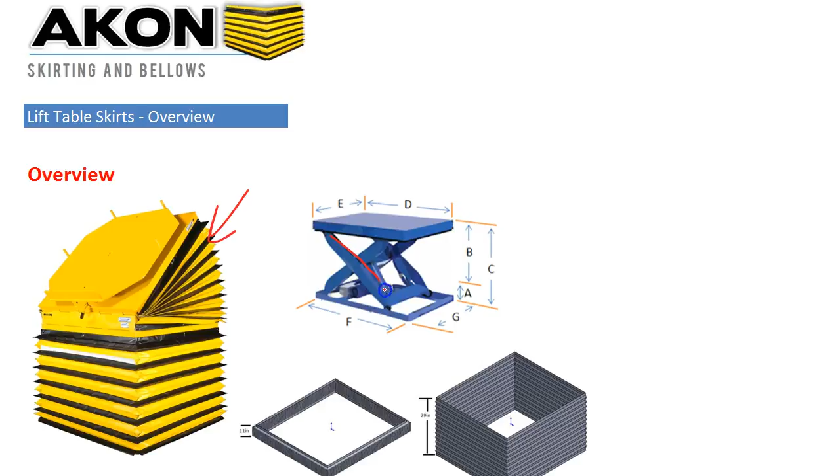A lift table skirt, to define exactly what it is, is material that covers up the dangerous scissor arms located inside a scissor lift table. These scissor arms are shear points, so they have to be guarded because people can get their foot or hand in these areas, presenting a safety hazard for workers. OSHA requires guarding pinch points from devices or machines in your facility to protect your workers. That's where the lift table skirt comes into play.

It's essentially a bellows, so it looks like this, and you have an inner dimension and an outer dimension, which we'll talk about later. The lift table skirts connect around the frame of the lift table, and then they go down and drag or rest on the floor. Some people choose to connect them to the base. Usually the top size is larger, so you would attach here and might have a large top platform like this. So you have a smaller skirt even though you have a larger top platform which has dunnage on it.

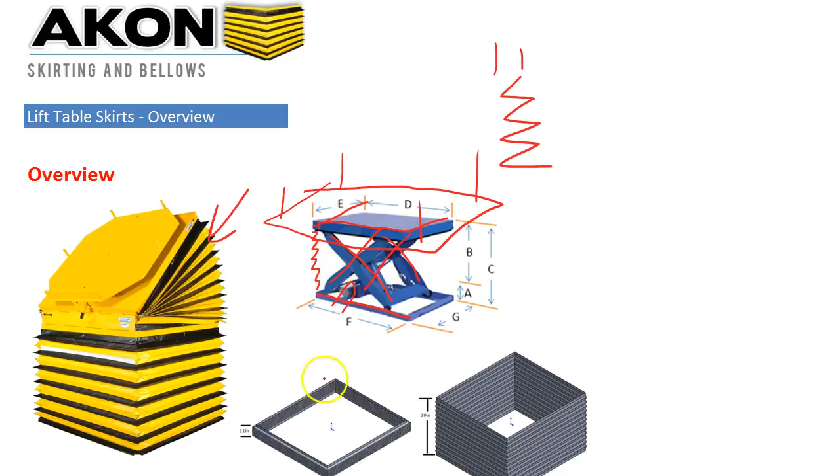The materials used most commonly, I would say probably about 95% of all skirts sold, are a stitch skirt. You can see here there's vinyl flaps stitched together. We take great pride in giving a very clean looking stitch. The material is a 22-ounce vinyl, industrial grade, rated for up to 160 degrees Fahrenheit. You can do moderate welding around this material. It's fire retardant. This is what it looks like when it's installed on a lift table. They look very clean and can be just about any size.

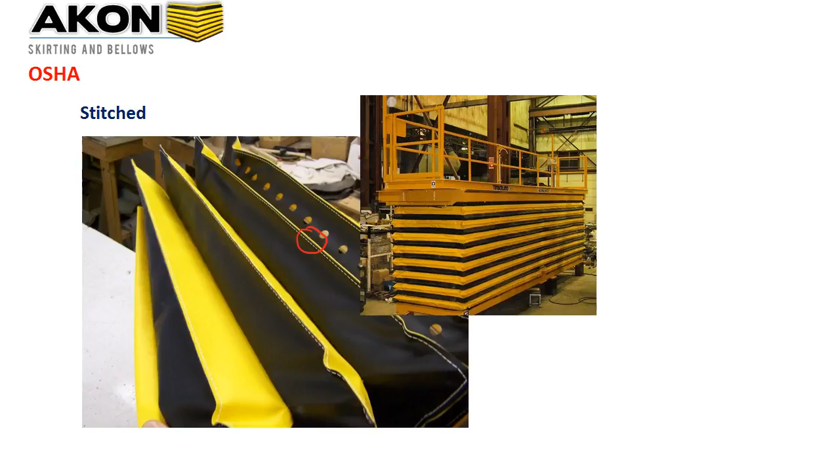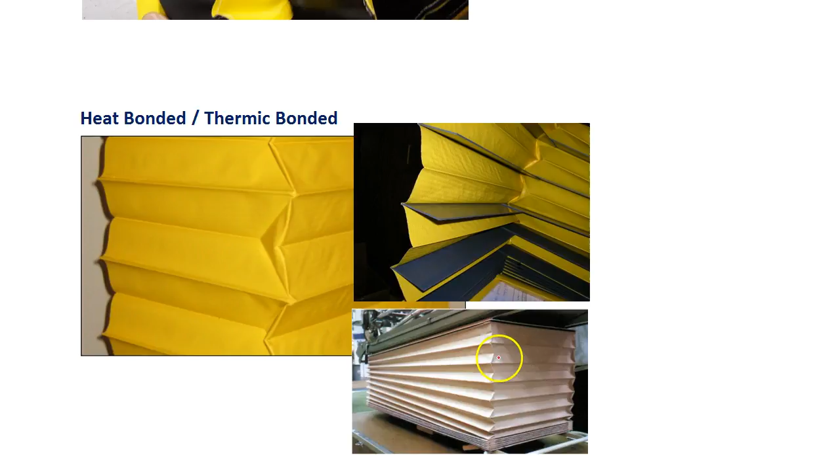Another material, which is also fairly common, is the heat bonded thermic material. This has more of a crisp look, and we sell this to Xerox, one company that purchases this from us, and other facilities who need a very clean looking skirt. This is actually reinforced with a PVC rib, which runs every other fold, and that's what's providing the structure to this skirt. Where it gets the heat bonded description from is it's heat bonded to that rib the full length, so it's bonded right to that PVC rib structure. It's a very strong skirt, great for real small folds. If you need a 1-inch fold, we can use a very small rib, and this has a very clean, crisp look to it. It's a more expensive skirt than the stitched, but sometimes the aesthetics are what people are after for that particular model.

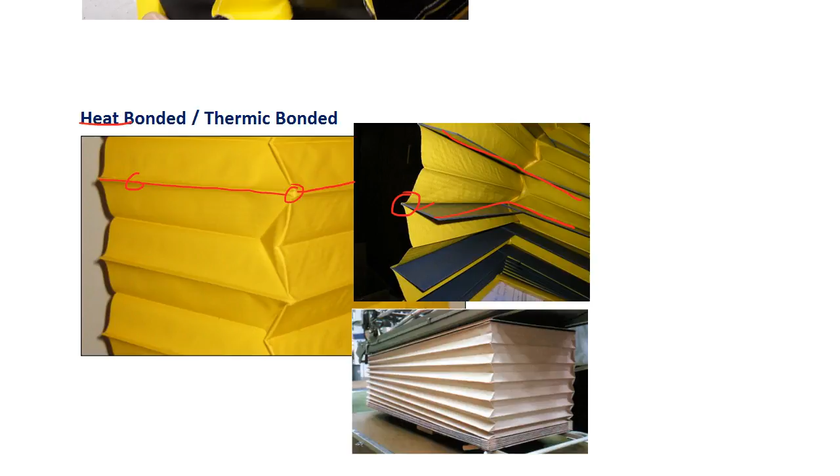Then we have medical grade skirts. These are used around a wire frame. You can see here a stainless steel wire rib, and the material is pulled over it. This has approximately a 1.5-inch fold. The ID is the inner part and the OD is the outer part, so it's 1.5 inches greater than the ID. This material meets a lot of high specifications as far as flame retardant, washdown applications where food processing is concerned. This is a very nice skirt, but definitely the most expensive one we sell, so we only use it when it's absolutely necessary based on the application.

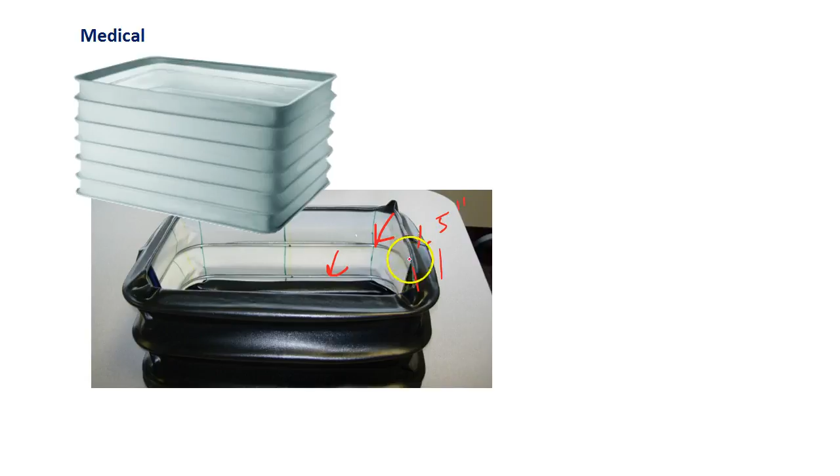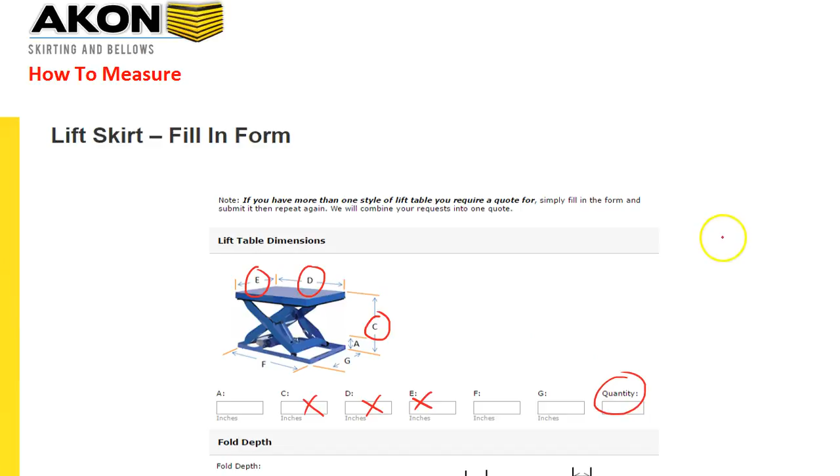As far as measuring, this is our actual RFQ form right from our website, so we'll walk you through this. The information that is critical is your top platform size, E and D, and also the raised height, C. So if you can give us E, D, and C, that's basically the information we need. If you have A, G, and F, that's helpful as well. But if you give us these three, and of course the quantity, we're good to go to provide you a quote for the most part.

Now fold depth is the depth of the fold. Remember we talked about ID and OD. An external fold is the safest and most common, and a 3-inch fold is the most economical and most common. Here you can see the fold is facing away from the lift table, whereas the internal fold faces inward. The smaller the fold, the more expensive it is, and also the higher the stack up of the skirt because there's more material. The 1.5 and 2-inch are more economical than the 1-inch, and the 3-inch is the least expensive. So if in doubt and you don't have any space constraints, just choose the 3-inch.

The fold location, as I touched on above, is either facing inward or outward. The outward is the most common because you don't have to worry about the fold coming in and hitting the scissor arms, or maybe there's a motor or something inside your lift table you need to be aware of as far as how far that skirt fold can face inward. You don't want it dragging on anything or rubbing on anything, so you want complete clearance for it to go up and down.

So again, if you're in doubt, just choose the external fold unless you have some specifics of your application which won't allow for it. The top attachment, most common, is the steel flat bar, both top and bottom. Even if you're not attaching it at the bottom, it's a good idea to get it because this steel flat bar has some weight to it.

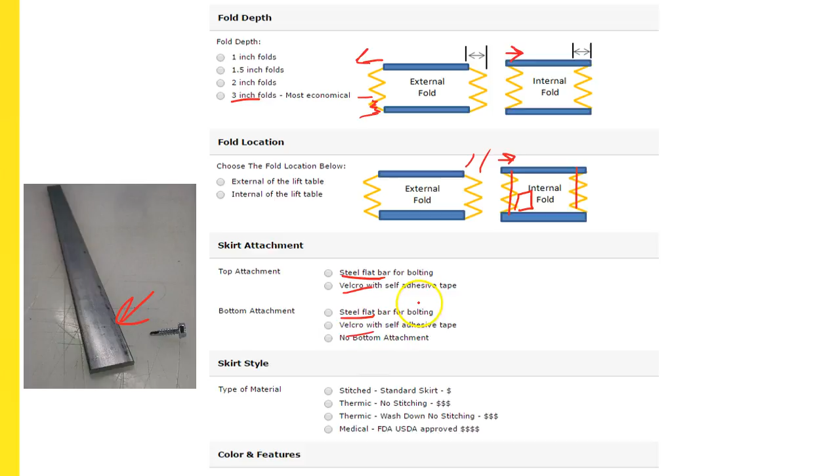Velcro is generally only used if you're going to be attaching it, just so it holds it in place so you can fasten it with a Tek screw like we show here. The Velcro eventually dry rots and falls off, so it's not a good long-term solution. But some maintenance people say give me the Velcro because it holds it there while I fasten it to the skirt or to the edge of the lift table.

So at the top of the skirt, when you choose flat steel bar, there's going to be a pocket of material, and then you're going to have your bellows, and at the bottom there will also be a pocket. This flat steel bar goes in these pockets, top and bottom, and then you just take your Tek screw and attach it to the side of the lift table. As I mentioned, you don't have to attach the bottom. Some people just let it sit down here and it just gives it weight.

So material, we touched on that earlier, and we have little dollar signs here to help you choose based on what you're trying to accomplish.

So if we go down a little farther, we have our colors and features. Black and yellow is by far the most common. Then you have all yellow, all black, blue, and other colors. Those are more expensive. These three here are the same cost, and anything besides that will run a premium of about 20%.

Stiffening wires. It became an industry standard a while ago to put stiffening wires inside of the skirts. We generally try to stay away from them unless it's a really big skirt, because then it gives it structure for the stitch versions. What happens is the wire tends to pop out of the skirt.

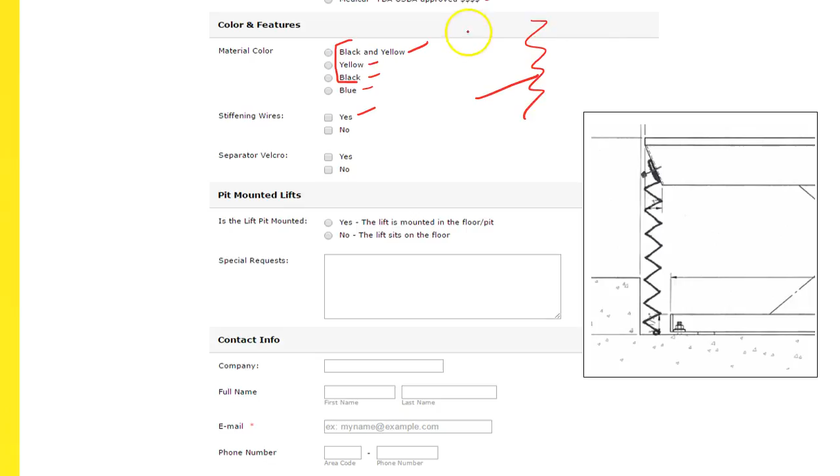So here you have a fold, say this is the corner, and then people come by and that's a foot, and people trip on the wires or catch their pants. Eventually they just like to pop out because it's a piece of steel inside of a piece of fabric. So we try to stay away from them, and also they're more expensive to put in.

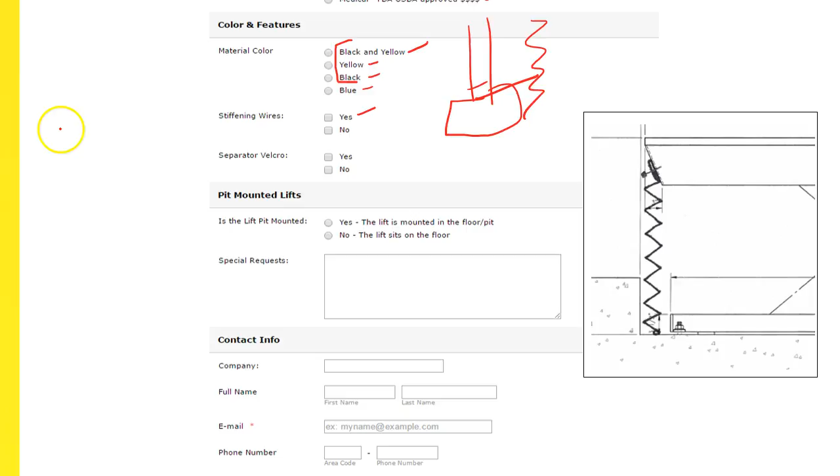Separator Velcro. If you have a lift table, let's say it has a very large top platform on it like this, and here's your actual lift table. When you get your skirt, you're going to install this from the top down. So if you have this large platform, you're not going to be able to do that.

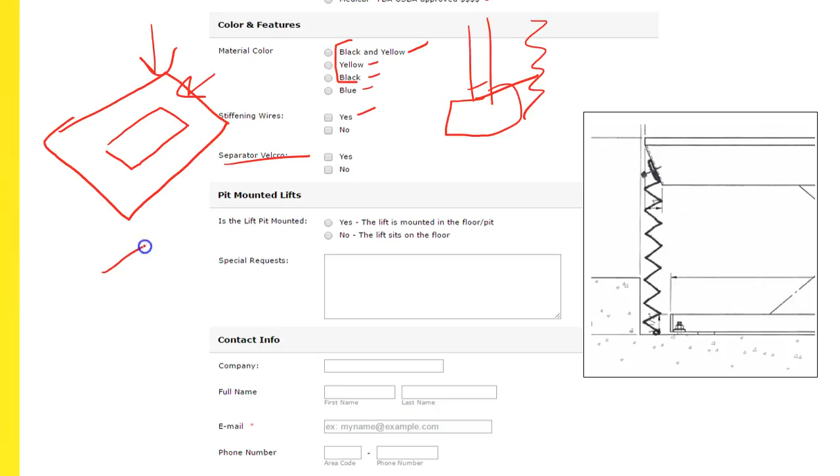So what the separator Velcro will do is you'll get a skirt and it'll have a split, so you can actually wrap this around coming in from the side. You just wrap it like this and then Velcro it together once wrapped around. That is the reason why you want a separator Velcro. If you don't have an oversized top platform, it's definitely not needed, and it costs more money, so I would just stay away from it.

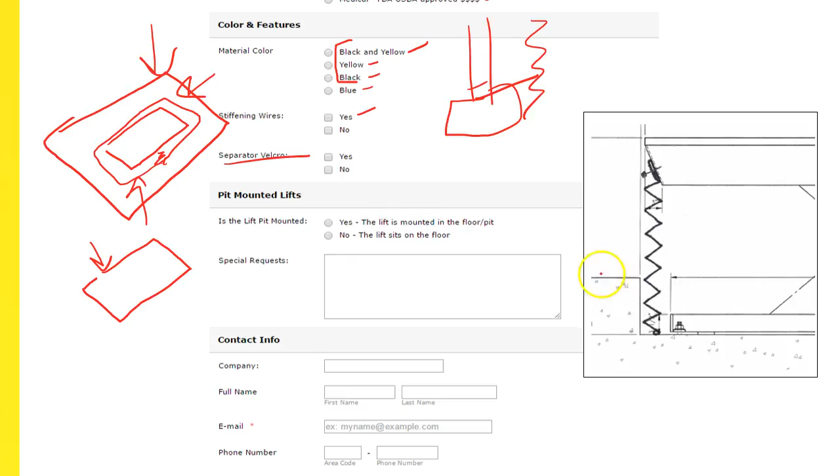Pit mounted lifts. This is very important. If you have a lift that's in the ground, so when your lift table comes down it's flush with the floor, those typically have an angled steel toe guard on them. So if you have this configuration, just check the yes button, and then we'll know how to properly configure it. Give us dimensions from the top platform, or you can give us dimensions from the bottom of this toe guard. Either way, if you could note whether dimensions are from the top or from the bottom of the toe guard, it helps us properly configure it.

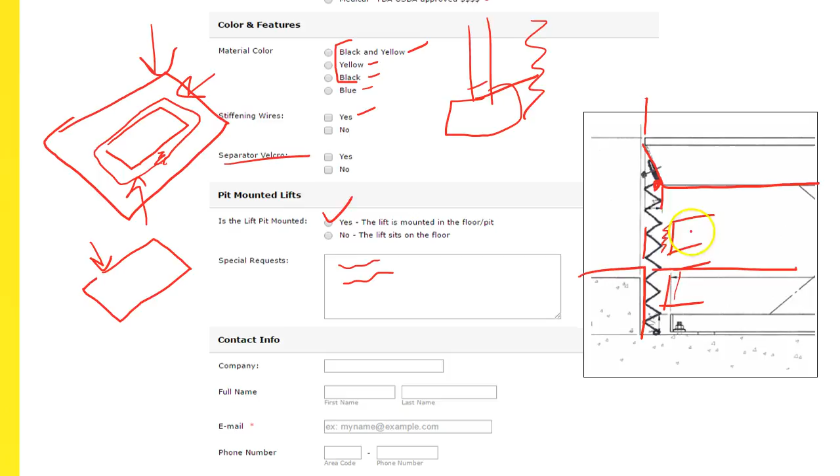With this particular style, you need to make sure you're going to have enough clearance from your lift table. So if you choose a 3-inch fold, you need to have at least 3.5 inches between the pit wall and the lift table to make sure there's enough room for that fold, because you don't want it to bind on the side of the pit wall. If you're unclear about this, just email us, and we have a very specific form we can send to make sure you're not going to have any interferences.

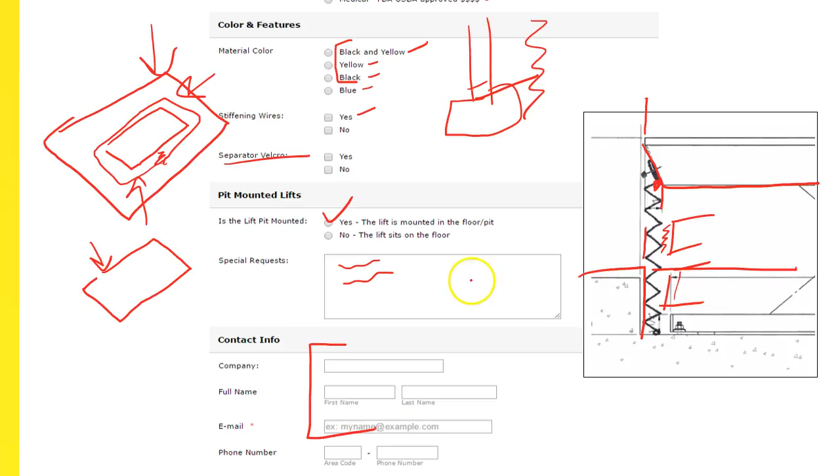And then, of course, your contact information. It usually takes us about 10 minutes to get a quote to you, and they're very detailed. Once you get it, if you have questions, you can of course ask us. So hopefully this video was helpful. If you have any further questions, just drop us an email or call us, and one of our associates can walk you through the process.